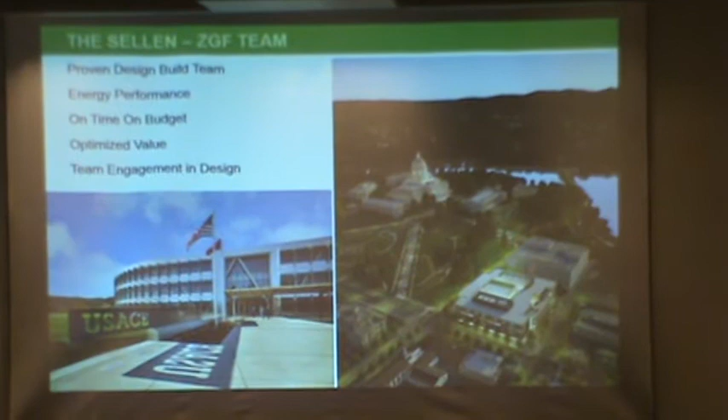We think we have a lot to bring in terms of our teamwork ethic and the way we can bring value to this project, which is an important component to us, and that teamwork extends into, we think, a new way of thinking about doing business on campus, but leaving a legacy that we can all be proud of in the end, both as architects, builders, and as citizens.

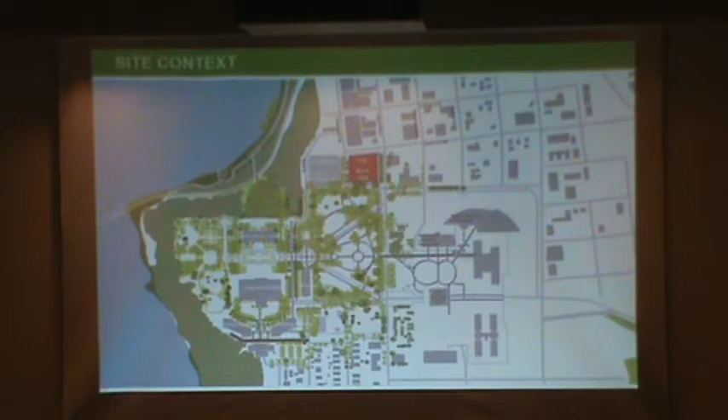So really for us, starting out in concept, here's our site, the site context, and on the heels of the recent adoption of the master plan for the campus, the landscape master plan, the re-imbibing of the Olmsted Brothers landscape has been a big component we'll talk about in a moment, but it really represents the kind of completion of the vision. We're really excited that that's a tentative project moving forward.

But I think more importantly for us, that was anchored to this thought of made in Washington, of Washington. We're really inspired by the original Wilder and White grouping. The selection of this campus, essentially with the ledge, is really another mountain in a sense. This is embracing nature at once. It really represents what the state is about.

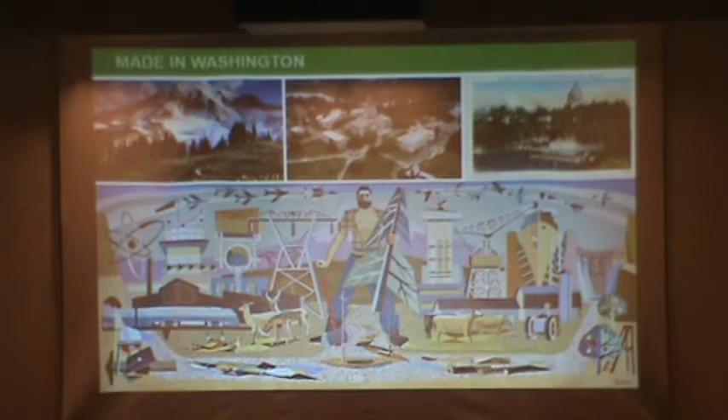And then internally within the GA buildings, the old Gene Corey Beal 1959 mural. It's a good year. It's the year of my birth, so a lot of good things happened that year. But it really represents the cornucopia or the mosaic of the strength of what Washington is, resources, people, our strength and endeavors moving forward. So those are two powerful and instructive components to help us shape the vision you're going to see today.

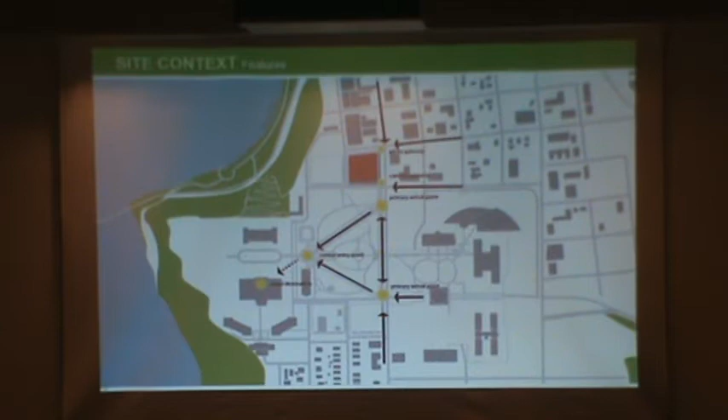The site context is interesting. As you well know, it's really an urban gateway and a campus gateway site that really understands, in some respects, the vision of the campus over time. And of course, the original arrival for campus was envisioned by steamship or railroad in downtown. One would proceed up Capitol Way and on axis to the ledge on this side.

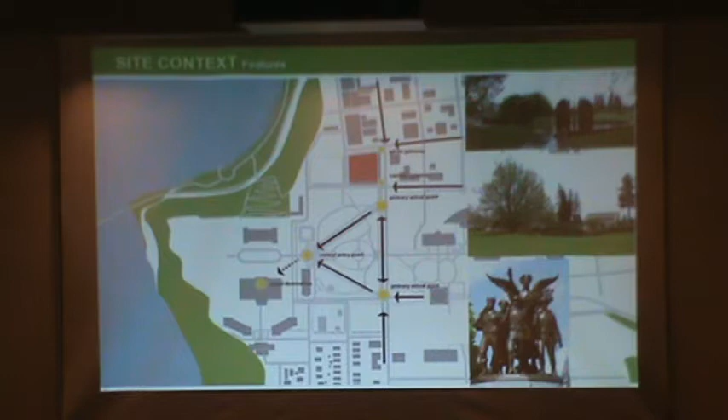Of course, with the introduction of Mr. Eisenhower in the 1950s and 60s, we had the interstate highway system, where we now have an evolving methodology of understanding the campus. So we're understanding how do we honor old parts of campus, and how do we think about the new parts of campus as well that are big drivers in that context.

And as we were moving forward with this process, we're also thinking about how this building can represent a good example of where we can help take planning for this Capitol campus in the future and really evolve by thinking about future sites and how they address the greater Capitol campus, the Olmsted lawn, and opportunities to really expand and connect with the city and the campus at the same time.

And that's really putting it in the context of a larger growth for the next 50 or 100 years beyond that, but you need to think at a lot of different scales as you evolve and think about how you support a vision for your state capital campus.

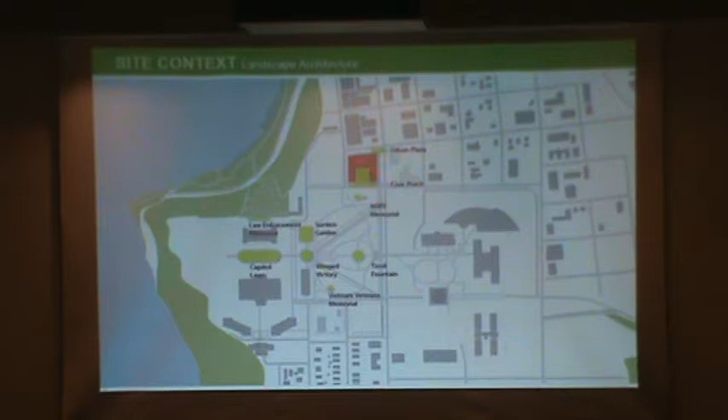Within the campus, there are a lot of embedded jewels, which are really important things to understand within the larger landscape. A lot of those are a memorial or honorarium or ornament that are really powerful components, and you'll see in a moment that our goal was really to embed one of those pedestrian scale elements within the greater lawn, within our building, beginning to have a dialogue inside out, outside in between key components of the campus.

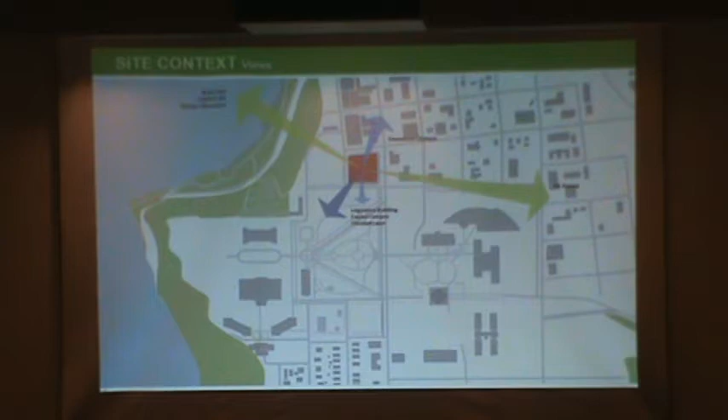And as well, of course, coming back to the anchor of views, connections to the landscape, those are things that flow through the design and are part of the public experience of this building as well as the workplace experience. So that's something that's designed to be shared by all within this concept. And again, it's a tremendous opportunity to really take advantage of a spectacular location within the state.

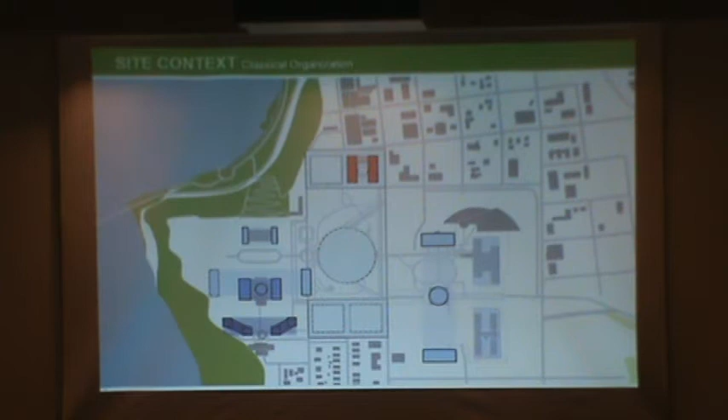And then we're trying to honor what is old with what is new, and that was really understanding the bones of the classical organization of the campus, making sure that our modern framework fit within the original founders' ideas about how we began to organize our building.

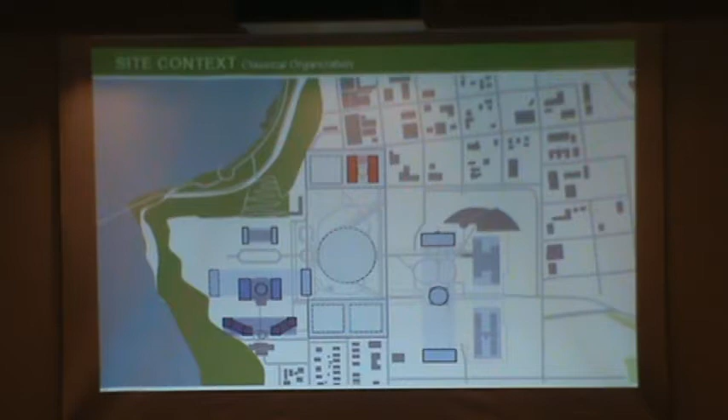You'll see that in a moment in terms of the simple bicameral organization, the two houses, that actually began to inform how the Capitol campus is organized. We have two wings that get tied together, but are really a simple fundamental for the development of our building based on the old architecture, but looking forward to the future as well.

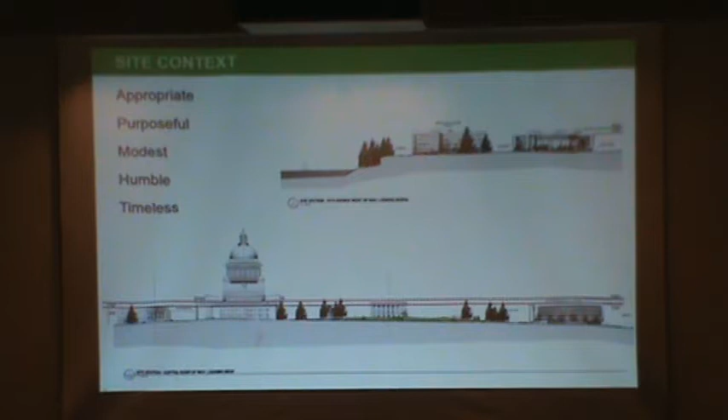At the end of the day, our building is not meant to overcome the grace and qualities of the ledge and the Capitol. It's really meant to be appropriate, purposeful, modest in that respect, and really represent a subservient building to that overall goal, but really a very powerful servant to make sure the work gets done in a very appropriate way within the Capitol and the best way it can be done.

And to that end, we really are minding the limits of the height, the 59 feet, which are big drivers in that context. So our big strategy really for this building was thinking about two important things for us. How do we connect the building to its larger urban neighborhood, the city of Olympia, and the streetscape along Union, as well as how do we begin to make a stronger connection to the Olmsted lawn.

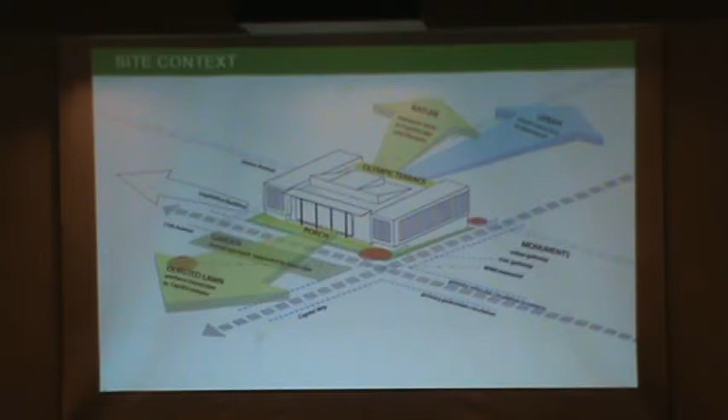And you'll see this word porch. We thought, how do we make a new model for a building that really says, how do we invite the public in, connect it to the landscape, bring that landscape in the building, and really honor that. And that starts really at what we call the front porch of the building, opening up and having more transparent, neighborly kind of feel for the building along 11th.

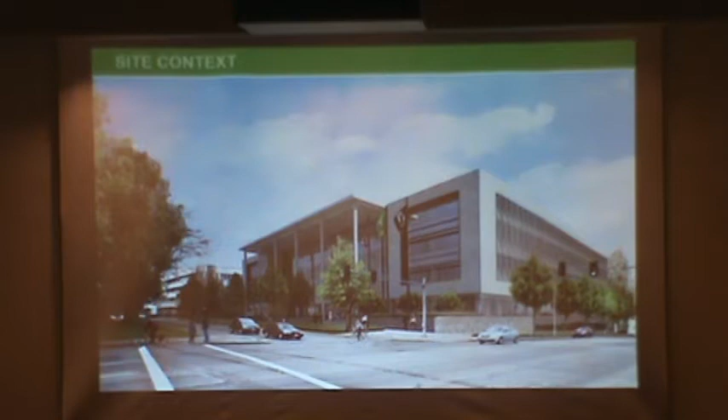This is the Capitol and 11th, looking towards the west, as well as creating a more powerful urban circumstance for the city of Olympia in terms of the urban streetscape of the building and the way it scales and fits within that context. And to us, that was the excitement of being a good steward of your state capitol campus and moving a project forward that would be appropriate and mindful of all those objectives. So, that's a little bit about the big outside and the big picture.

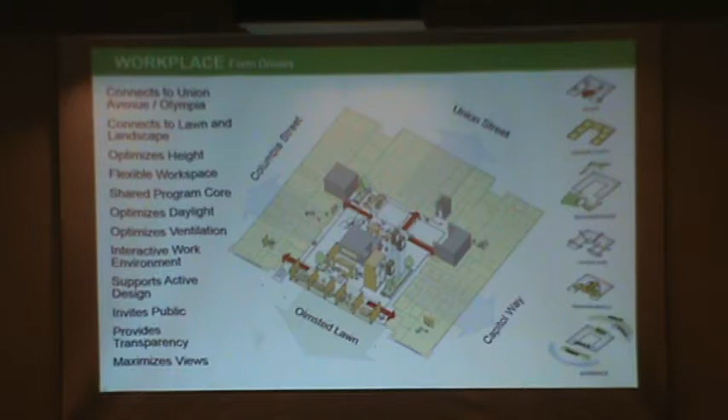Success starts with good bones for a building, and for us, building the building on good bones is really important, and that needed to be efficient, flexible over time, highly effective as a workplace, and really optimize the environment to put people in. We'll hear some things tonight about the overall evolution of this plan, but essentially what you see facing what we call the Olmsted porch or the Olmsted lawn is a C-shaped building. It is very rectilinear. There are no curves in here. It's very efficient for planning, straightforward, with narrow wing widths to ensure daylight and connection to views on all angles.

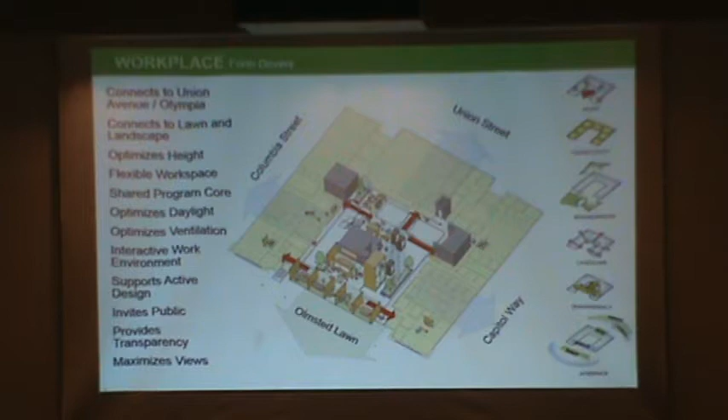And then within the core of that building hold a number of distributed and shared interaction, break, and office spaces that make up a kind of mixing volume for the building as a strategy. Those are all connected in ways that allow us to have this tenanted in many ways in the future, so it has ultimate flexibility within the context of how we develop planning in the building over time as it needs to over the next 50 to 100 years.

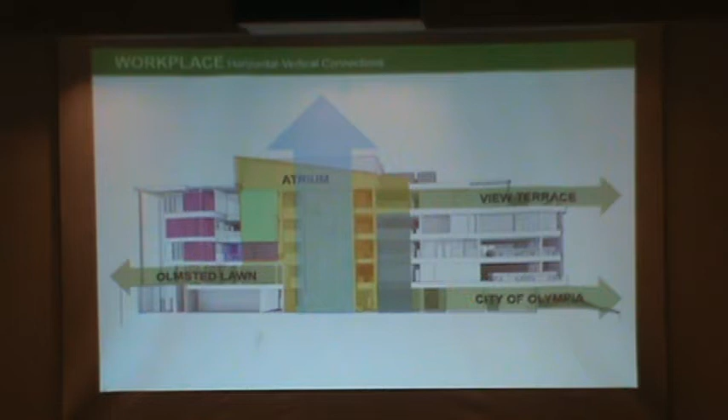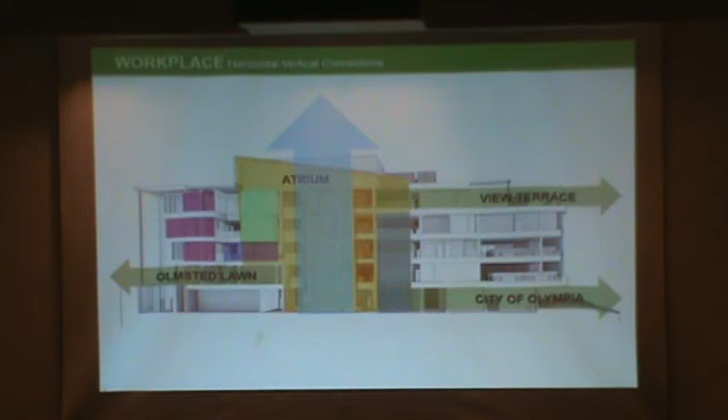Another big component that was important for us is understanding not only horizontally how the building works, but how can we integrate the building vertically as well. Connections down to Union, the city of Olympia on the lower level where there's the public entry, the Olmsted lawn or front porch here, which is at the lawn level. And then as we move up the building, there are shared distributed functions that can be used by those within the Capitol campus. There are also public amenity spaces as one moves up and down in the building. So we're really looking to break the mold, lift people up, and make it more transparent and engage government as part of the overall campus as it goes forward.

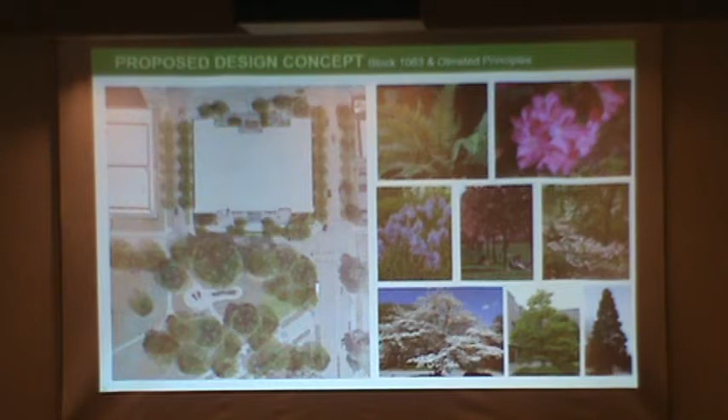A little bit of a zoom in on the site, coming to think about our position. And again, our goal was really to think about the Olmsted principles. The Olmsted brothers built the campus on a strategy of service before beauty. Everything has function. You'll see in our plan, we've also thought about the large sets of trees that exist on campus. Those are going to help shade the front of our building in the summer. They're powerful visually, but more importantly, we've been thinking about how do we integrate the layered planting that was part of the Olmsted plan within the context of our building, so that we can begin to develop those sub-layers of landscape as the master plan for the campus is fulfilled and moves forward.

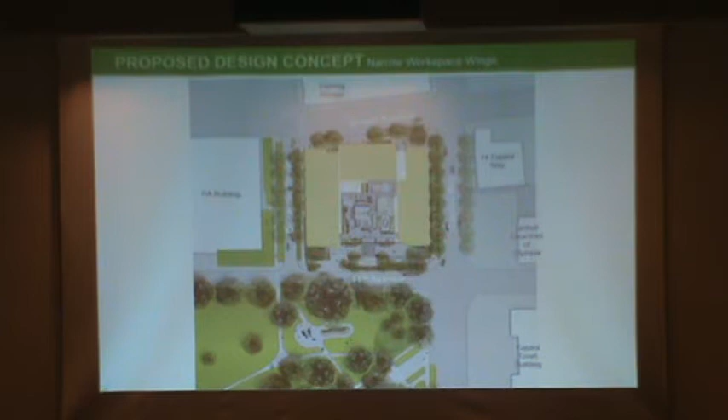I mentioned a little bit about some of the jewels on campus. You see here that strong connection of the building to the landscape, the fundamental bicameral bars that we developed with a small infill piece along the Union Street frontage. What's really at the center of the campus is that primary porch and entry. We'll talk about that setback. You can see all the shared and collaborative areas in this sort of indoor-outdoor plaza in the middle.

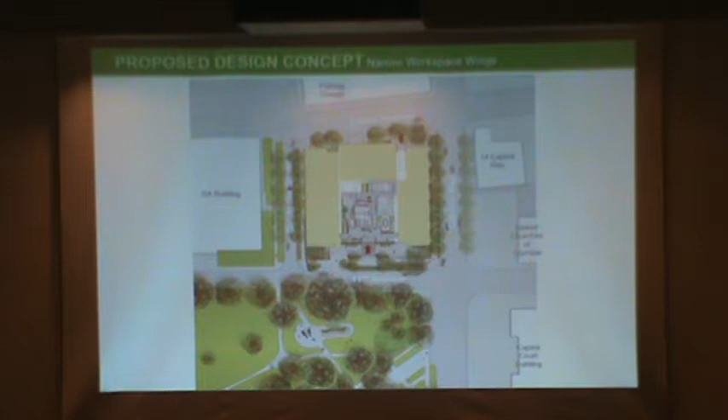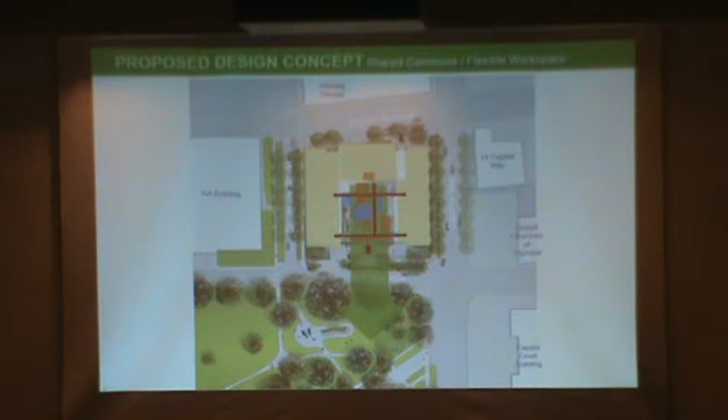And the real goal here for us has been to create a jewel within the building that is part of the inside-outside experience that connects the lawn and that overall landscape experience to the Capitol grounds in that context. And that's been the big driver: transparency, sense of openness, and connection within that context. Within that amenity space are shared core elements for vertical transportation, conference and break areas as well, and clear circulation paths that really look to create an inside-out, outside-in architecture that really honors all those pieces.

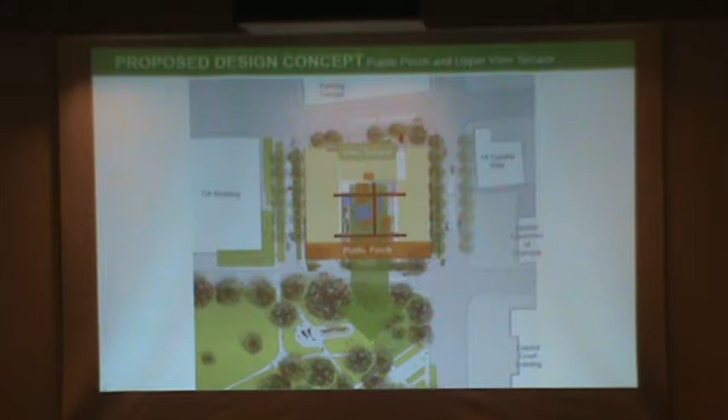Strong streetscape around that, and we'll talk about that, but probably more importantly, this understanding of creating a porch that is really the larger kind of idea behind the building, almost for us the Olmsted porch, that really celebrates the lawn, invites people in. And for us, that takes shape and manifests itself in the architecture of the building as well. The two larger wings, which are somewhat formal on the flanking sides, you can see here the large porch structure in this context.

I mentioned a little bit about the big trees that exist. This one is retained on site here. We've established landscaping that works around that, a small drop-off. And then a larger setback here of 25 feet. We've essentially put on this porch front space to sit out in that lawn, meet your neighbors, really come together and have that sit in the sunshine under cover as part of the overall strategy.

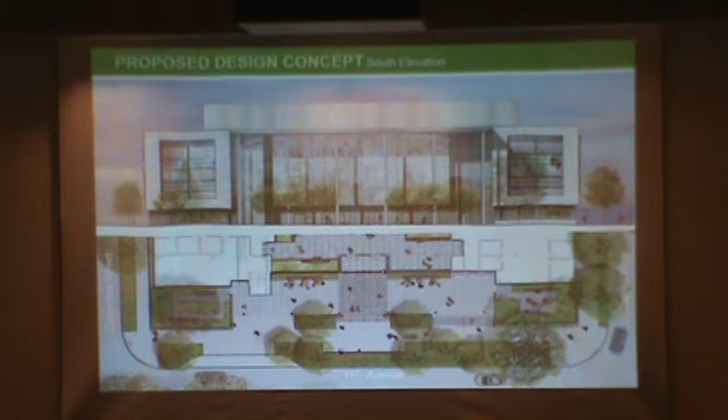We've proposed in terms of artwork, you can see here, a very light ceramic frit pattern on glazing for the interaction and conference spaces beyond. It's actually a replication of the Jean Cory mural, which is replaced inside the building, and is really, again, a big marker of that big cornucopia or the mosaic of the state of Washington. Pretty straightforward porch though, very simple architecture, supporting the overall goals of the campus. Again, landscape, you can see the connections inside out.

Here's the front of the building, that larger setback with seating areas, development of plaza and landscape pieces that are important parts of connecting the workspace, as well as connecting citizens with what's going on inside the building. Again, very transparent idea, an open porch. And again, bringing across subcomponents of the Olmsted understory on a great spring day like today when the quince is out or the dogwoods are starting to come out, is having that color and fragrance as part of that overall experience. It really brings the lawn into the building as well.

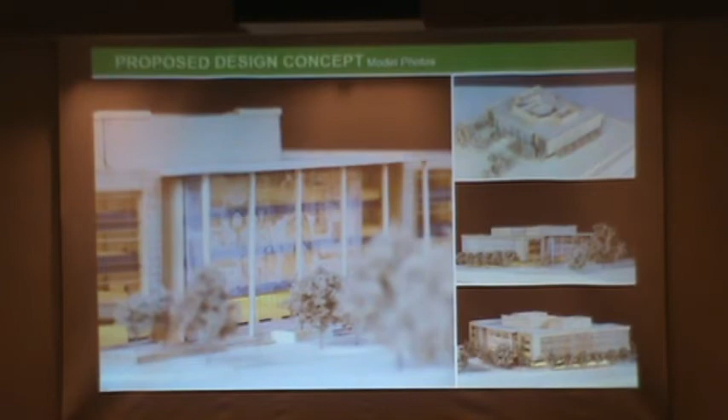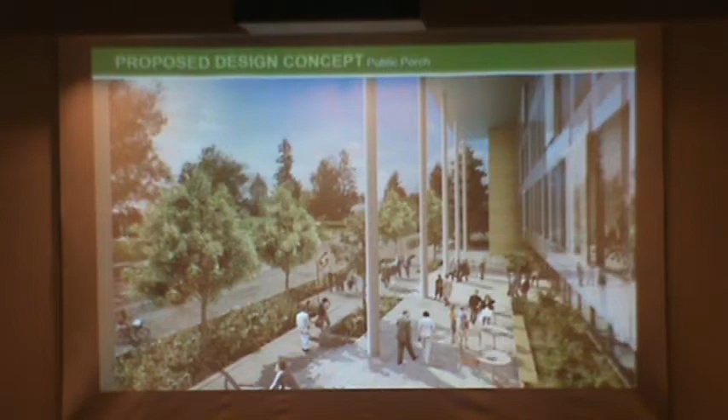A couple of quick model shots of that as well. You get a sense that big porch is a big driver and really a big welcoming element. It's much different than a big flat facade that says, maybe come in here. This says, come, this is part of your government. Come be a part of that. That's the big welcome for us, this sort of interactive area. Great views back to the Capitol and really an interactive environment in that larger setback, which is a really important component for our team to think about.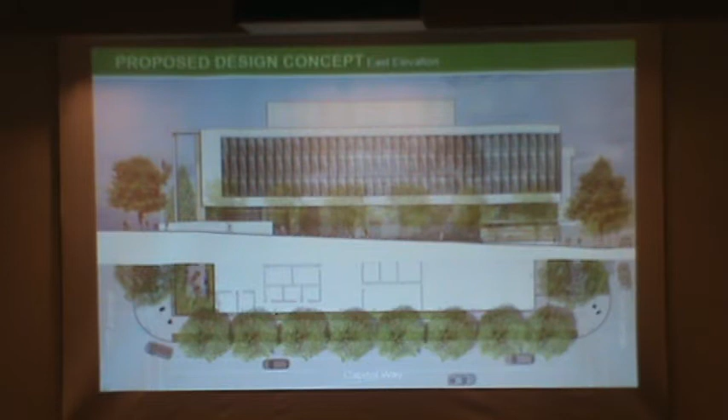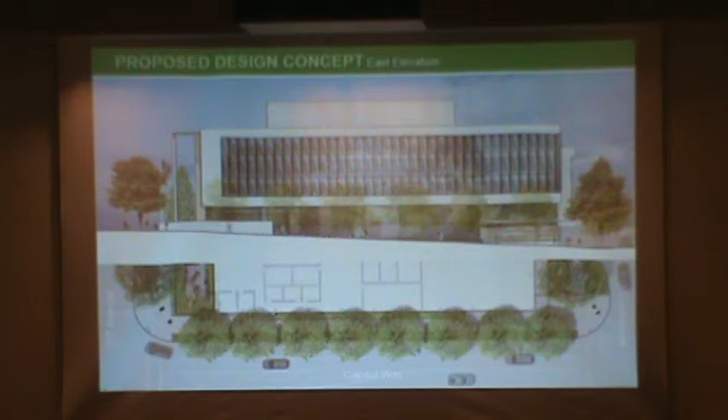The frame or material aspects of the building here are a lightweight cast stone product that has the attributes of stone, but more modern attributes in terms of thermal performance and flexibility. That's a big part of that. And then you'll see, we'll talk about in a moment, there are stainless steel sunscreen elements here that optimize the lighting and glare experience within the building, as well as optimizing ventilation within the building. I'll mention briefly metal screen wall elements on top for the penthouse pieces of the building, but a very simple armature that honors the original groupings, thinks about how the building can have a very simple and straightforward appearance.

Along Capitol, we've made some concessions. We've set the building back 5 feet, and that was good for us because that 5-foot setback allows us to really keep the existing street trees that are along that side, give them time to grow. Those are an important part of our lower story sun control as well as a great pedestrian experience. Again, you can see the planting strips on both sides, a little bit of widening as the plazas as we move down on the east and west sides of

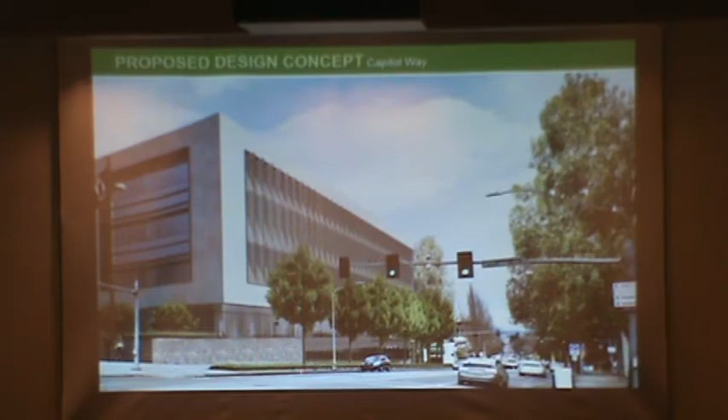the building. Again, just a shot from Capitol looking down towards the city, down Capitol Way. Again, those trees, the simple formal framework, that cast stone, stainless steel screen elements on those 3 floors, glassy components, cast in place concrete, and then that streetscape landscape. Very simple tenets or bones of the building, as is most of the other original buildings on campus.

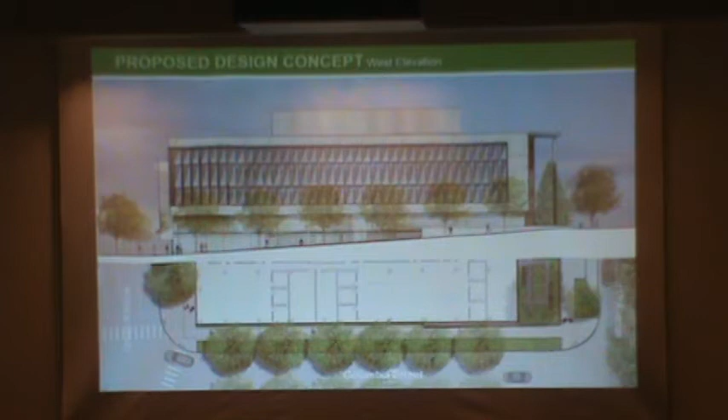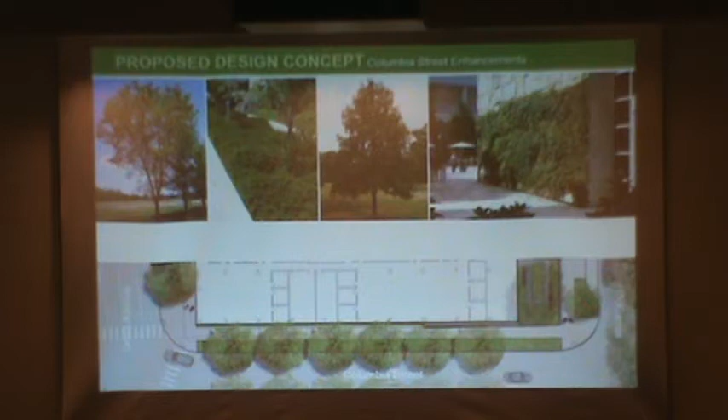The west facade, again, is very similar, same thermal issues we face, treated in much the same way. And again, you can see the porch overhang in the front, that larger setback in porch area on the south face of the building. Similar streetscape developments, as well as some potential to grow landscape materials up on this concrete plinth as well. And this looks forward to kind of the next evolution, I would say, of the GA site as we move forward.

And then our second entry site, this is the Union Avenue front door. We have 2 front doors for this building. The primary piece here, you see the Union Avenue entry, which is a floor below the Olmsted entry. You'll see that there's a state seal here. This is a legacy state seal, a heritage state seal that's removed from the GA building and replaced on the civic side of the building, introducing that entrance.

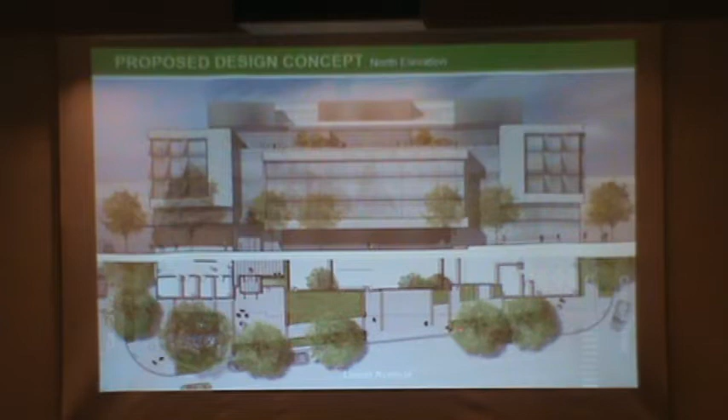In this context, there are massing alterations. This is a public terrace and building terrace on the upper parts of the building. We've broken the building up to give it more character on the city side, a different entry environment. We do have service access here, but we have, more importantly, glazing and entrance points around the different flanks of the building, and a lot of scale and character to the building as well. The building is rectilinear. It allows us to develop this second landscape on the city side as well.

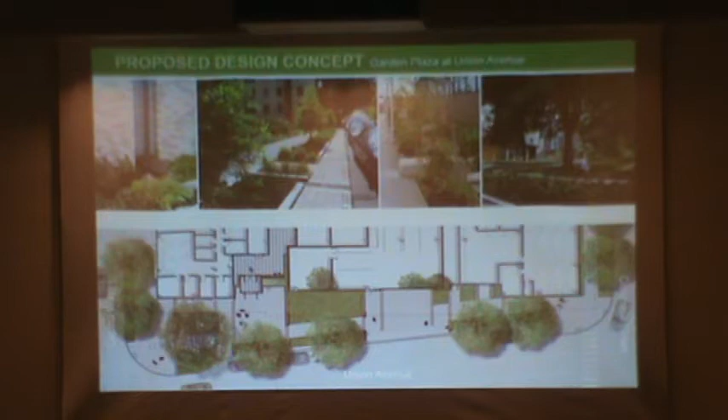In that context, it's really about stormwater. It's on the downhill side. There's a smaller entrance plaza as well that accommodates this secondary entry to the building. And the goal here is really to celebrate the stormwater components as well as bring appropriate plantings that really liven that streetscape and improve the overall quality of the Union.

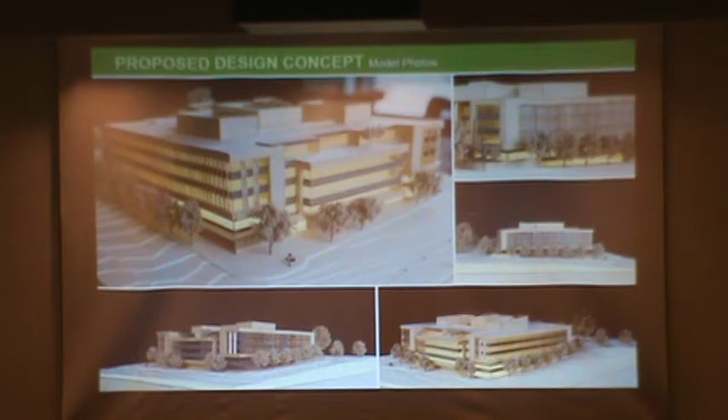And as we move back up, there's this upper level terrace in the building as well. This is an incredible view terrace. We call it the Olympic view terrace. It has a chance to work off of conference spaces within the building as well as shared space in the building. So it's really an amenity zone that can be used by the public as well as staff within the building. And again, just a couple of model shots of that, and the scale and character at the back of the building. I would point out that we have 39 different sunshade elements, each representing one of the 39 counties within the state of Washington.

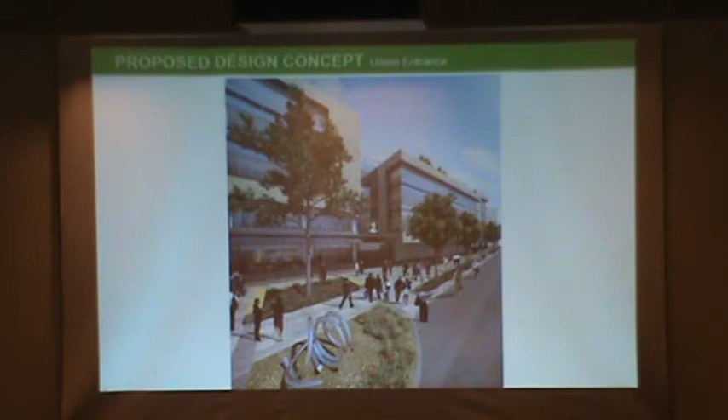And then really on the tail end, you gotta have fun when you do this stuff. On the tail end of that, you can see a quick view of this. Again, there's that state seal, a little bit of texture, seating areas as well as streetscape, and then a chance to help celebrate markers. This is another bit of fun. This is the sort of unsprung artesian spring, really, a gateway art piece to thinking about how do we celebrate the city as well as entries to the state capitol as well.

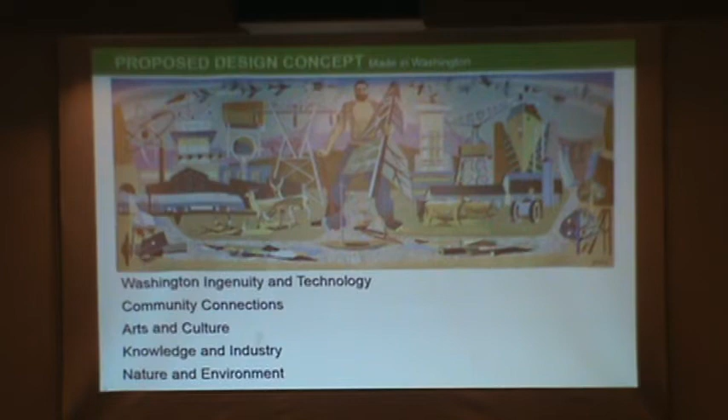So that thinking really pushed us into the inside of the building as well. And I think what's important to point out is that the themes of the Jean Cory Beall mosaic mural really inspired us to think about a wayfinding strategy that organized different floors within the building with a different theme based upon what you found in that mural. We would pull color and wayfinding to integrate that within the overall story. I'll just walk you through 1, 2, 3, 4 quick stories.

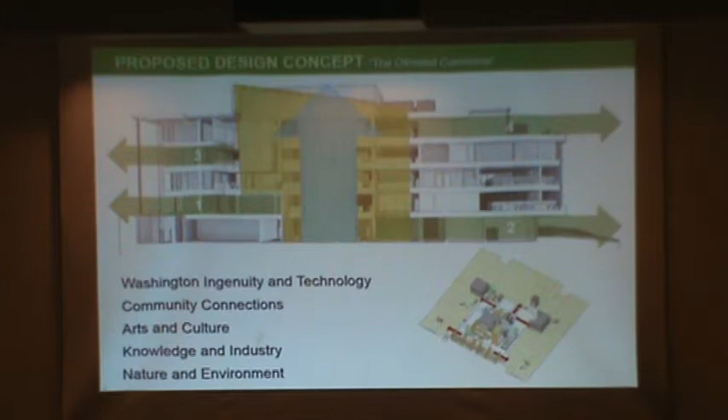You see the removed mural and replaced here within the sort of Olmsted Court, as we call it, on this flank of the building. Big vertical stair connector in that location. There's a big overlook in this location. These are elevators for the building. This looks over the Union Court, which is below this, and then a sprinkling of clustering of office and meeting space, as well as what we call the forum that drops down the lower level again. Really trying to create a mixed and interactive environment that is open and shared with the shared facilities for all.

This drops down one level to this Union, what we call the Union Court level. This is on the approach coming off of Union Street. You see this sort of zone here, this sort of what we call the forum, a grandstand that leads you up to that, and connects you to that Olmsted Court.

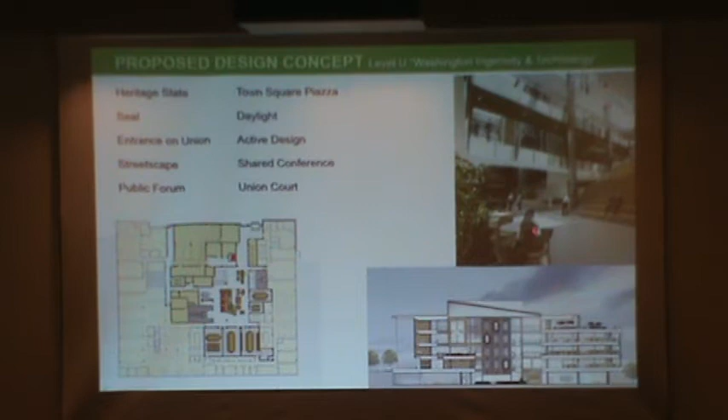In plan, we've located some of the larger conference spaces down here along with pre-function spaces in the darkness a little bit. Much of the time they are used in the darkness, and then adjacent support spaces around that, service and other components. But again, really driving daylight down in that space all the way through that atrium. You see in a moment, again, open elevators within the core, and again, that sort of internal composition to the buildings we think about moving up.

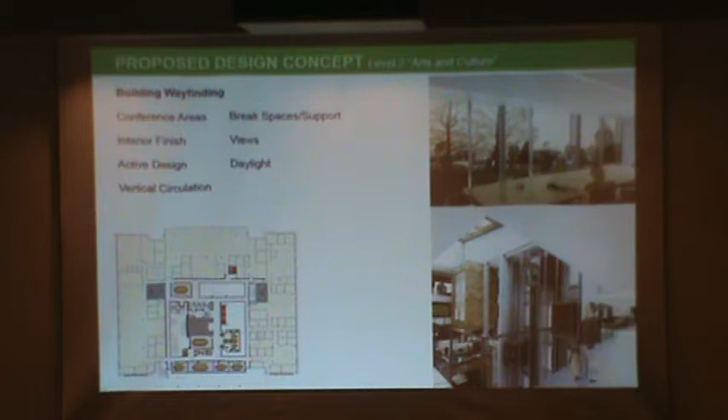Second and third levels are very similar, and again, we've looked at themes that would drive the makeup of some of the break areas and the theme of each floor. So wayfinding, this is sort of arts and culture, but again, conference interaction space, open space often within the greater open atrium components, shared facilities and toilets and break spaces as well as meeting spaces. So really a mix of pieces that allow this building to really live and breathe all the activities within it while allowing simple breakup of the functional space or the tenants within the building as well.

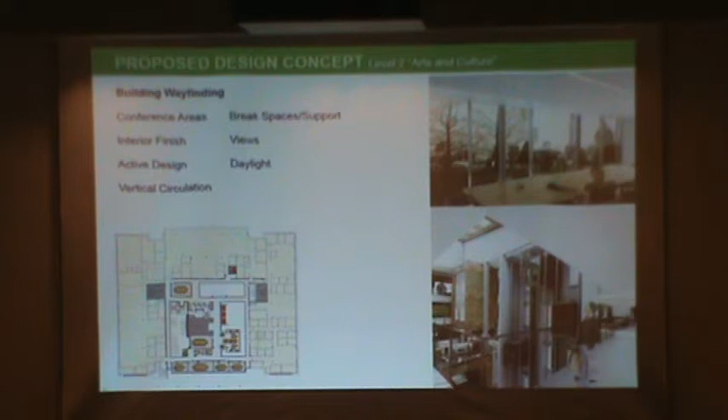Again, a mix of really simple materials, some wood accent, use of concrete, very honest and straightforward materials that for the citizens of the state would be very appropriate, but used in a very dignified kind of manner. So a really efficient kind of strategy about how we think about using materials in our modern buildings.

And then I'll say the fourth level, this is the nature environment was a big theme here. And again, our notion is that we get some additional light into the building through this upper conference room. It's glazed on both sides through the terrace. This is the Results Washington conference room. It's another shared conference and lounge space.

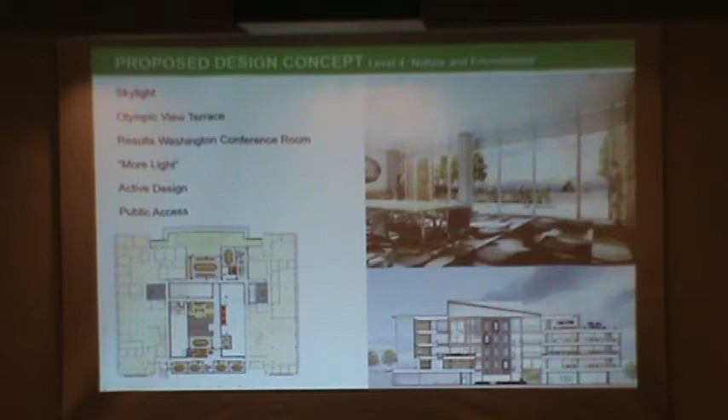But again, at the upper parts of the building, trying to bring light through in the building, trying to bring people up in the building, trying to really create a more vertical accented building that really draws people into its inner workings and creates a more visionary way of thinking about our building in the future.

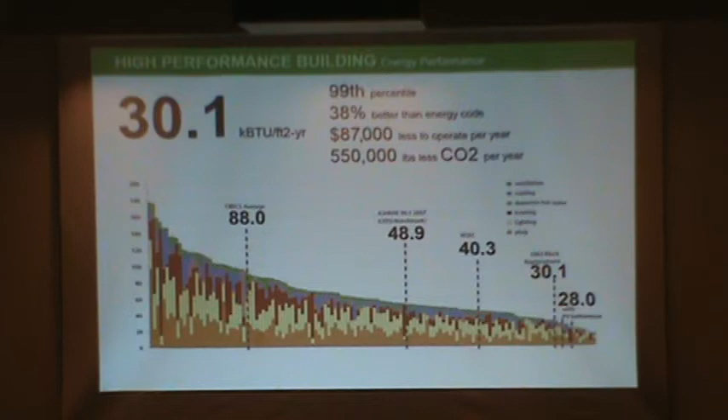For us and this team, this is all about being better and being much better. This building operates at a kBTU per square foot of about 30.1. It puts us in the 99th percentile of all buildings here within the Northwest. Saves the state about $87,000 a year to operate. It takes about 250 cars off the street every year in terms of its CO2 use. That's at this 30.1. We think there's more room to go if you pick this team, if we push farther within that. But being effective on energy use is a big part for us.

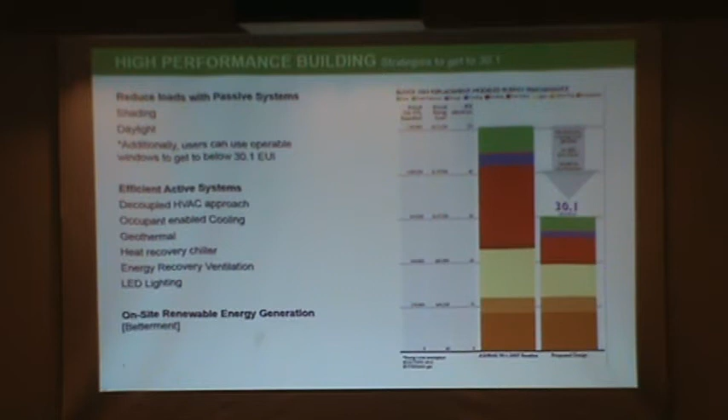The overall strategy for the building, passive systems. We'll talk about shading and daylight. We have a big atrium within the building that I didn't mention directly, but really that animates that central atrium. So there's passive things that are really important, daylighting, shading, and ventilation. There's also active systems that provide human comfort for occupants. We want to make the effectiveness of the occupants and users of the building as high as it can be. That's good for the state, that's good for the workers, that's good for everybody. That's what an optimal environment can do for people in terms of how we approach the building.

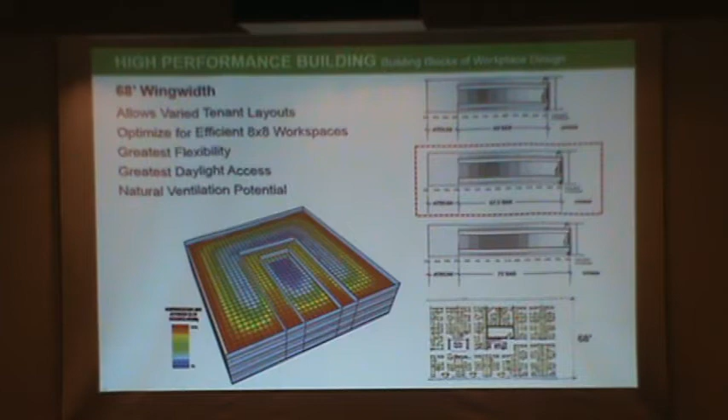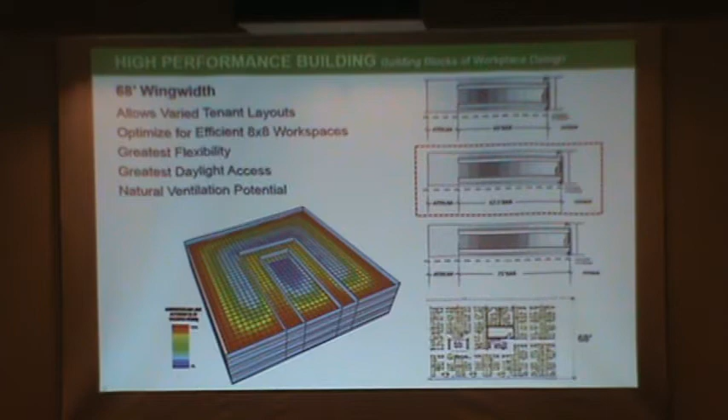Daylight has been a big part of that. We've optimized our wing widths to 68 feet. We feel, given the mix of space types, that this is really the right area to be in terms of optimizing daylight. Daylight represents about 50% of the overall energy use, and we have a chance to really reduce that substantially by the use of natural lighting for the building.

And again, these things are important because when people feel good and have connections to nature and they have access to daylight, they're more productive, they're happier, they work better, they don't go home sick. You have a more productive environment, a more engaged environment for individuals. They want to come to work, and that's the kind of building we want to create.

It really helps motivate workers, and we see this in the private workforce, and we really know we need to bring this across and help modernize the way we do work within the state as well. So it's a really important aspect of thinking about how it's going to affect the overall bottom line for the state within this context.

We're taking advantage of free cooling. 58% of the year we have the ability to draw in fresh air that's the right temperature for us within the building. We're really taking advantage of that in terms of our ventilation systems for the building and some simple thermal components we've done within the building.

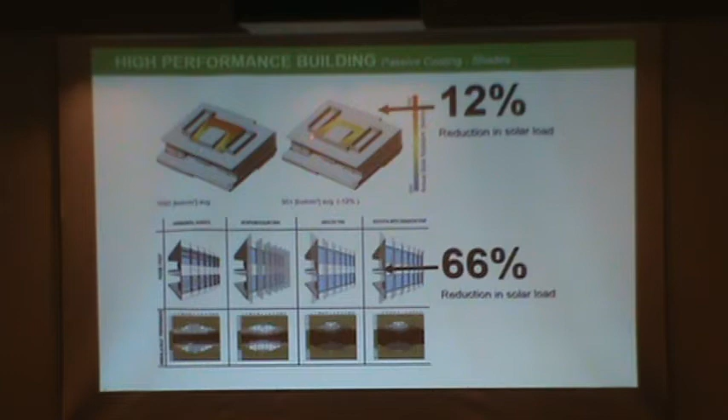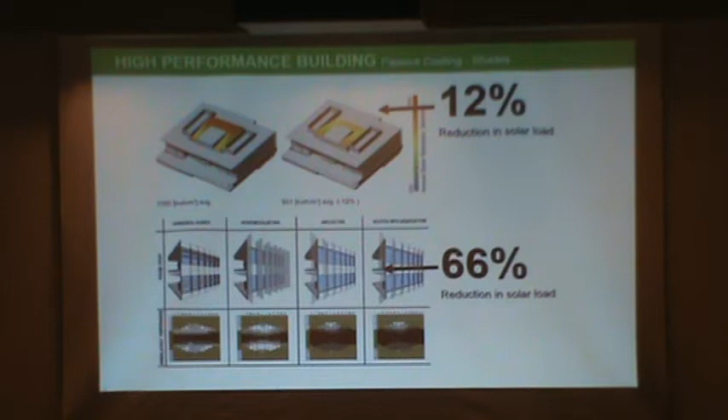The orientation, I mentioned the skylight. By simply tipping the skylight back towards the north on the top of the building, we're able to reduce the solar loads in that by 12% and provide a rich daylit environment down through that atrium core. And as we talked about on the east and west, we have stainless steel screens that by orientation allow us to reduce the thermal loads by 66% on those spaces.

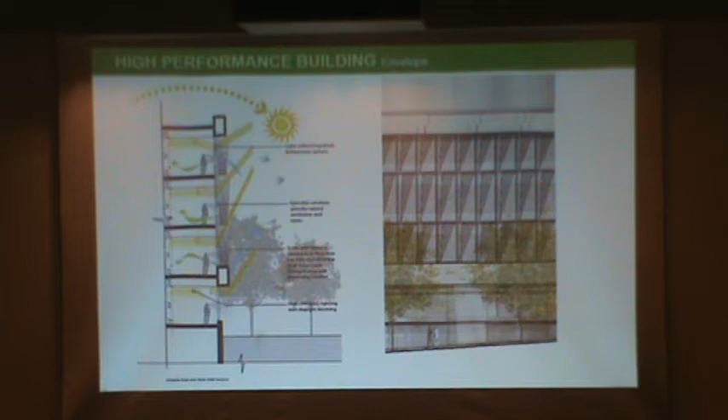These allow us to reduce the overall thermal loads, prevent glare within the workspace, yet allow connection to view within these larger, more modern sunscreen elements around the building that fit within the classical frame of the building. And those also allow us to operate natural ventilation windows within the building that optimize views out to the north, that allow cooling winds in our summer months, which do come from the north, that come into the building as well.

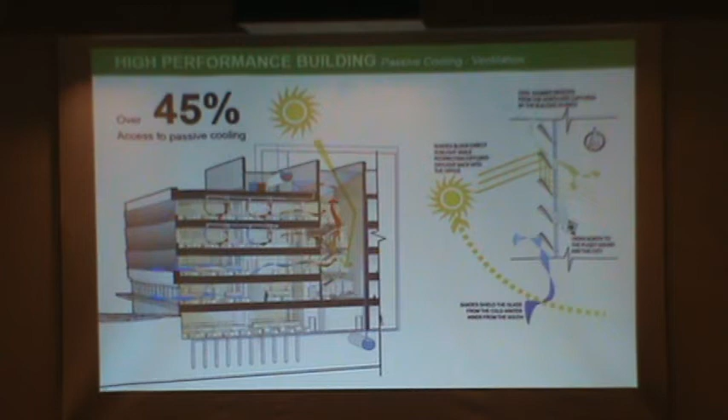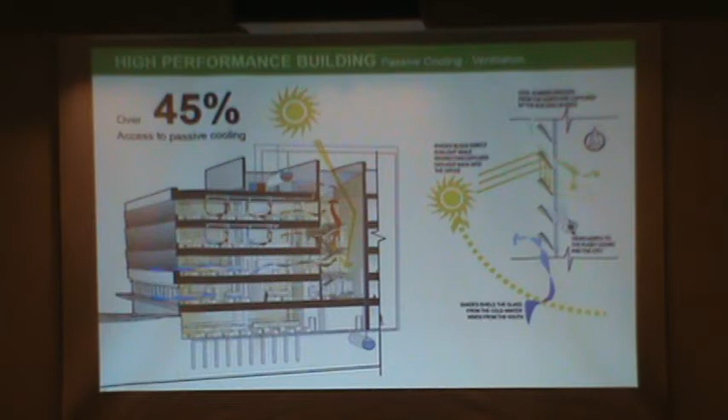These are operated by occupants within the building on the sensor system, so they know when it's appropriate to operate those, but it really allows us to manage the east and west facades of the building, which are really thermally intensive, and if we don't manage them well, will not be that good. We think this is a great way to do that as a passive strategy for the building.

About 13% of our energy is free. It comes out of the ground through a heat loop system. We use that both for heating in the winter and cooling in the summer. It's augmented by boiler and chiller systems when it needs to go to peak levels. It's not oversized. It's appropriately sized to be the most efficient kind of component we can have.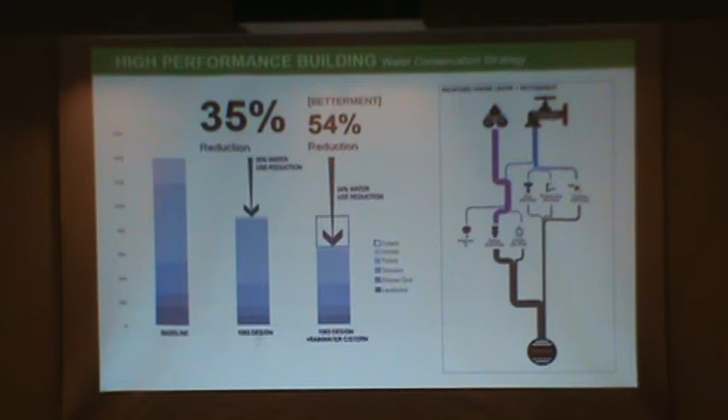So I think as our team went forward and started this project, one of the big things we wanted to do is think about how can this building be a celebration of the people and the industry of the state. And we started with what we thought was made in Washington, which became sourced in Washington. It was really about celebrating people within the state.

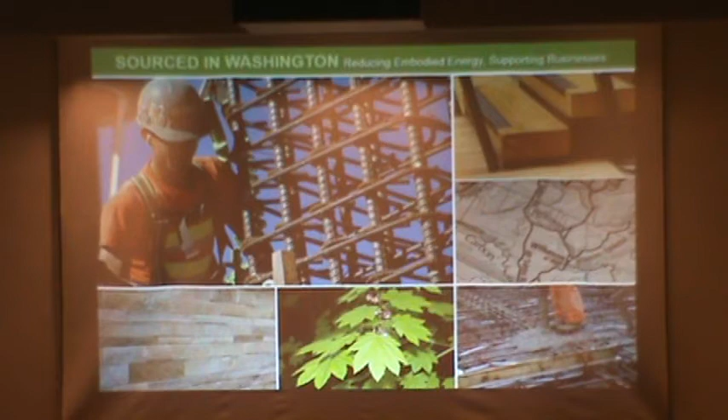75 cents of every dollar that goes into this building is products and energies of citizens in the state of Washington. We're working hard to make sure we're bringing as much of our ingenuity and innovation from our citizens and product developers into this process as well. And that's been an exciting kind of endeavor for us.

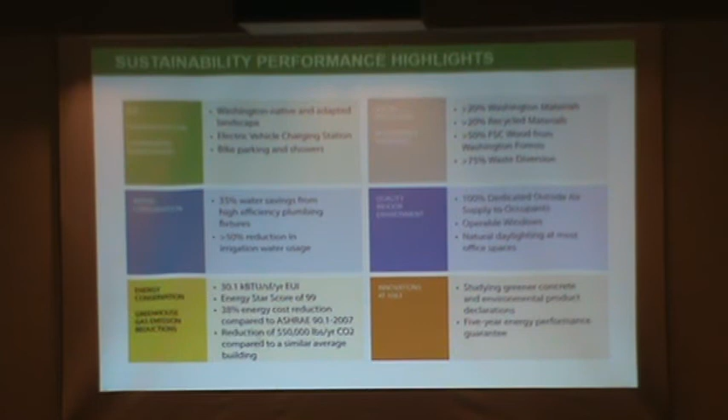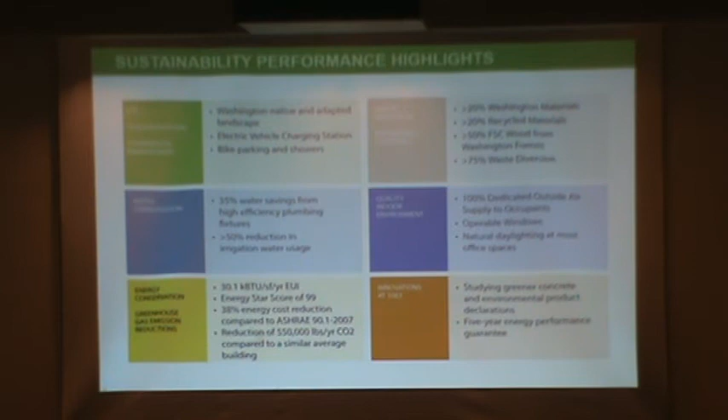And I've gone through a little bit of the sustainability pieces, but I would say that this piece down here, innovation, is something that this particular team really enjoys right now. We're working on really thinking about new ways to produce new concrete products that might have stronger environmental declarations. It can be really part of a new go-forward plan, inventing new products and pieces that really push the state and our industry about where we go with products and how we approach buildings within the state and keep the ball rolling forward in that respect.

We're at a LEED Gold right now, 75 points. For those who like to check the boxes, I can help you fill in the little dots if you brought your LEED chart with you today. But we know we can get even a little bit further if we have monies that come forward as we buy out parts of the construction. We're going to be happy to move those dollars forward for our PV pieces that can move us into the LEED Platinum range easily if we get those components.

So we're really devising a strategy that allows the construction process to really improve the quality of the project as we go through and find value and dollars within that. So that's our project. This is 3 minutes and 15 seconds of a quick view of that.

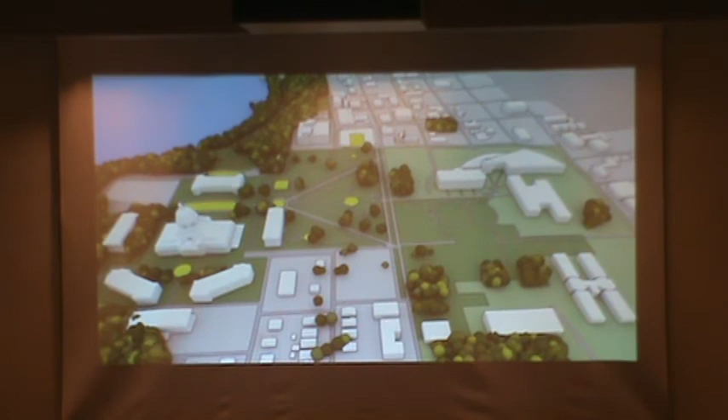Here's our site right here within the context of the Wilder and White grouping, the strong fundamental axes of that. But again, it has such a prominent location within the Olmsted context, the front door of that piece as well. And our goal has really been to begin to align it as a new component within the context of the city and the region because of the great regional views, but also have it play a role within the historic construct and organization of campus as that important piece.

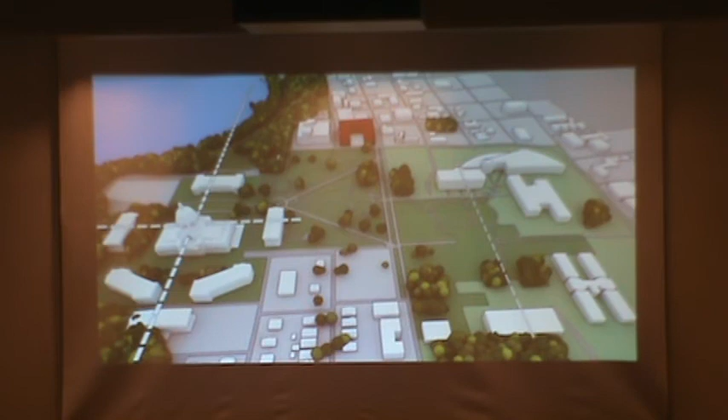Again, the bicameral, symmetrical development of the building, thinking about how it looks now and in the future as well in terms of how we develop the site. And probably more importantly, thinking about how do we honor the past, but think about a forward-looking building in terms of the way it fits within the campus.

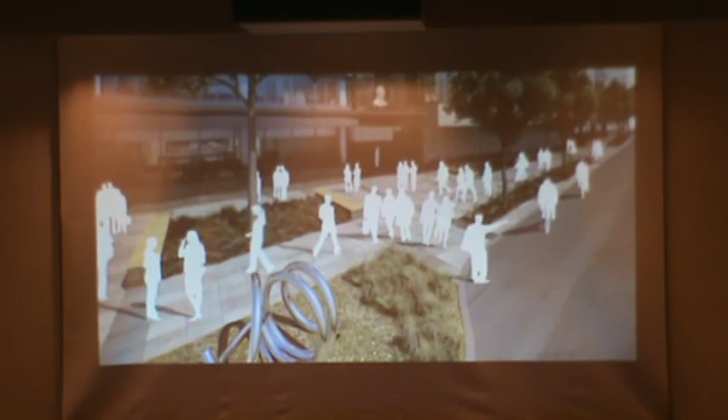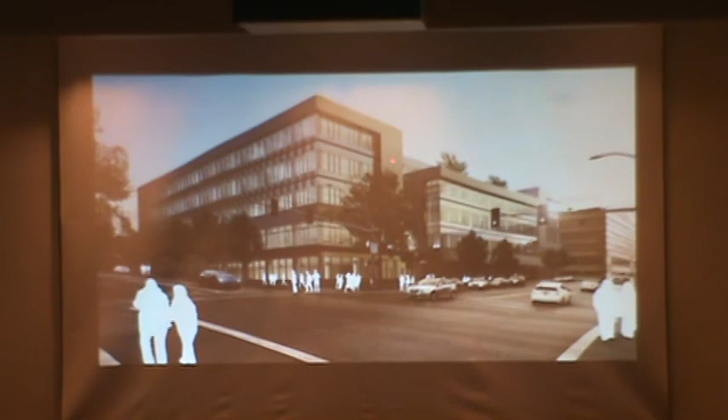This again is that Union Street view, that Heritage Seal of Washington, that second entry, really celebrating the city connections. We work hard to think about how the building integrates itself with the city, as well as within the Capitol context and being a good neighbor. And really having two front doors. You see the upper terrace, which is that public terrace with the view out towards the landscape.

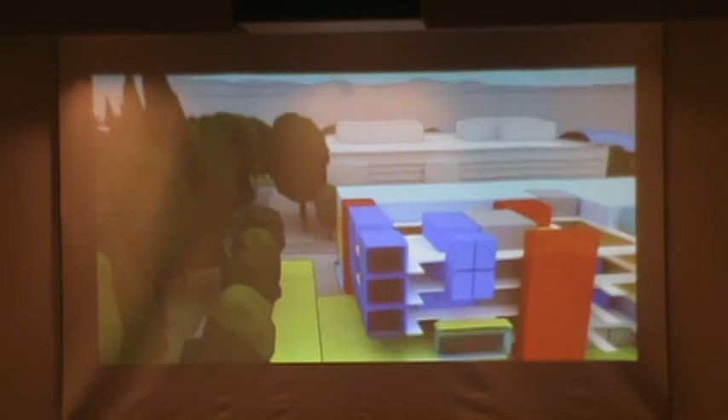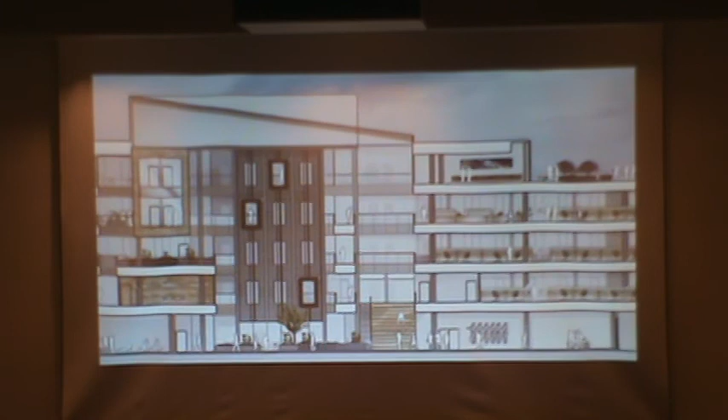The big program that wraps around that is a simple, functional, and elegant solution, a sophisticated solution that looks at the organization of the building. And then the multi-level development and transparency within the building. Because for us, creating a building that represented transparency for state government was really an important strategy in terms of stripping away walls and separation of the public and what goes on within the building. And really trying to connect levels vertically as well as horizontally is the big driver.

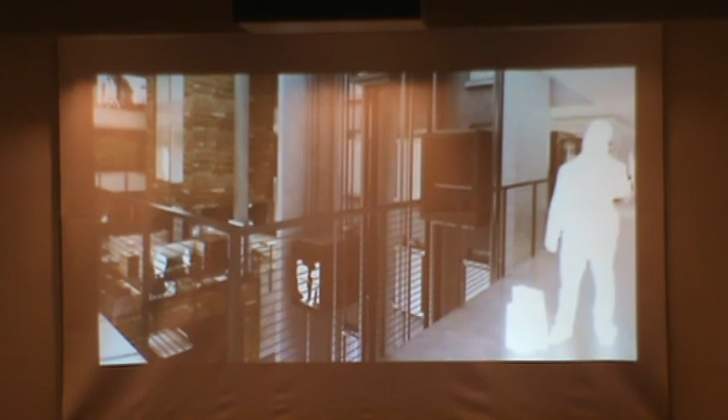Again, the heritage art piece in that Olmsted Commons, the daylight, you see the skylight above with reclaimed timber supporting that. And then some wood features for some of the conference interaction spaces within the overall makeup of that larger interior atrium space as well. Break spaces that are integrated in that, so we're mixing work and play, and we're creating a larger social environment for the activities of the building to be ongoing. And again, people have a greater sense of connection when they can see somebody move vertically between floors.

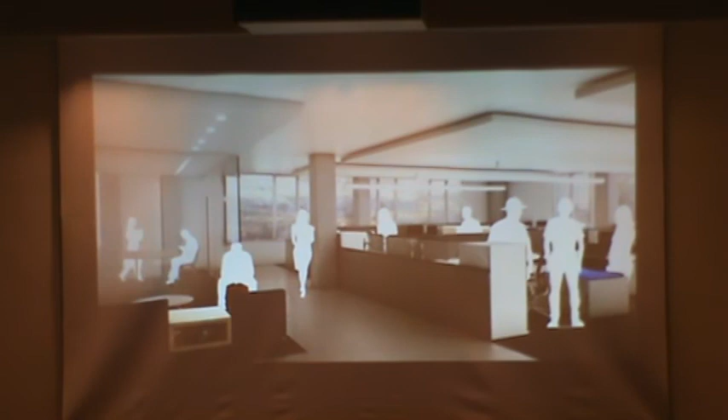And then, of course, the Olympic View Terrace for us, the opportunities to move the public out into the building and have them celebrate and embrace the building are important, as well as ultimately how we can effectively lay out the tenant space and create high-performance work environments for agencies that are housed within this building and connect them to the rich tapestry of the campus in a meaningful way. That's important for us.

So it's been our honor to participate in this great endeavor. We hope it bears great fruit for the state. We are poised, we are ready, and we are enthused about the opportunity. And with that, I will open it up to questions, and thanks for coming out on this somewhat nice evening.

Rick, I think we've got all the boxes checked. If you guys are ready, so. No questions? Okay. Thank you very much. Thank you, everybody. So we'll have another transitional moment. Next team gets in here. So you have time to run out and use the restroom if you need to.